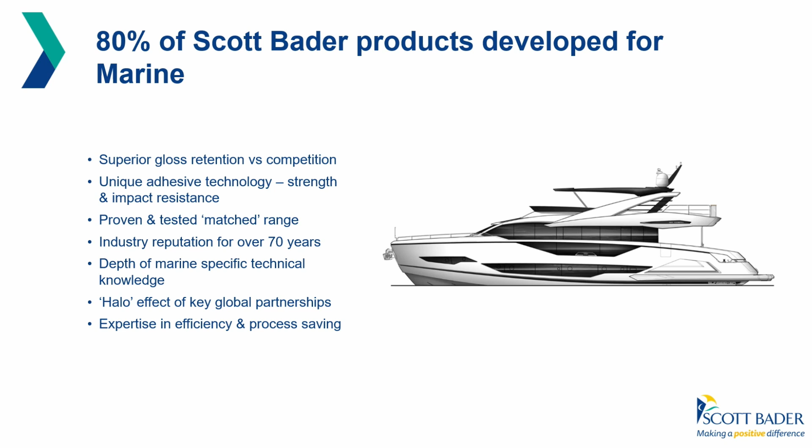This is just, I don't know if it's got a pointer.

This is just a diagram showing you where some of our products go into the marine industry. If you look on this side here, our Crestomer range, Crestafix range, I'm not going to go through each product individually, but they're used in deck to hull bonding, for core bonding when you're doing your PVC cores onto your laminates, your small fixings. Your Crestomers, it's metal to GRP, they can stick polyurethanes, they can stick various things.

And then obviously you've got your hand layup, the Crystic range, which is your hand layup resins, ISOs, orthos, we do vinyl esters, infusion products, 679, that's an infusion vinyl ester. We've got our interior finishing, so we've got Crestafix F26, which is for core filling. There's top coats for lining, the bulkhead for Crestomer bonding, gel coats and weathering for blistering.

So our LS88 and LS97. 97 is our spray gel coat, 88 is the brush gel coat, once again with great weathering abilities, and skin coats, vinyl esters. As the gentleman was talking before me about vinyl esters and water absorption, blistering, osmosis, we do our range of vinyl esters for those applications.

Fuel storage, we've got our resins that can handle various fuels, chemicals, different heats, and for diesel as well we've got a range of products. In the engine rooms, we've got our fire guard, which is part of our Crystic range. If there's an area with a possibility of fires, we can use that to coat it. And in the engine bed, stiffeners for bonding once again. So it gives a quick idea of where the products go and the range, and these are the products we are focusing on at the moment in Scott Bader Brazil into the market.

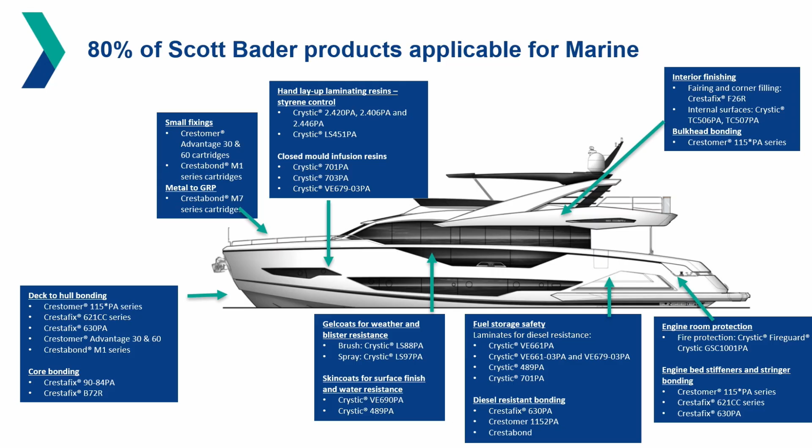Our marine range is basically summing up what we saw on the diagram. So the benefits of the matched systems, aesthetics. On this side you've got gel coats, LS30, which I'll discuss now, LS97, that's a spray version, and the brush, LS31 or LS88. Skin coats, vinyl esters, we've got 690, and 489, which is an ISO resin. And then on the laminate side for hand lamination we've got the various range, and then closed molding, RTM, those kinds of things, we've got a list of products as well.

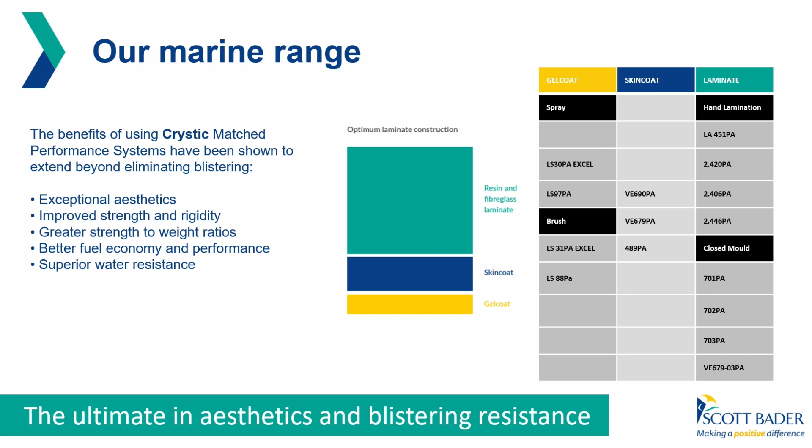So Gelcoat LS30 is one of our latest technologies, for better words. It's something that we spend a lot of time and effort in as a group. It's a strategic development product with our R&D facility, and this was also done in conjunction with a big customer.

So one of the big problems that most people have in the industry in boat building is porosity on gel coats, whether you're spraying it or brushing it. So LS30 has been developed over a period of time, and it reduces the porosity, well, almost eliminates the porosity if used correctly. Like any product, if it's not used correctly, it's going to fail. If it's used in the right application, it's good.

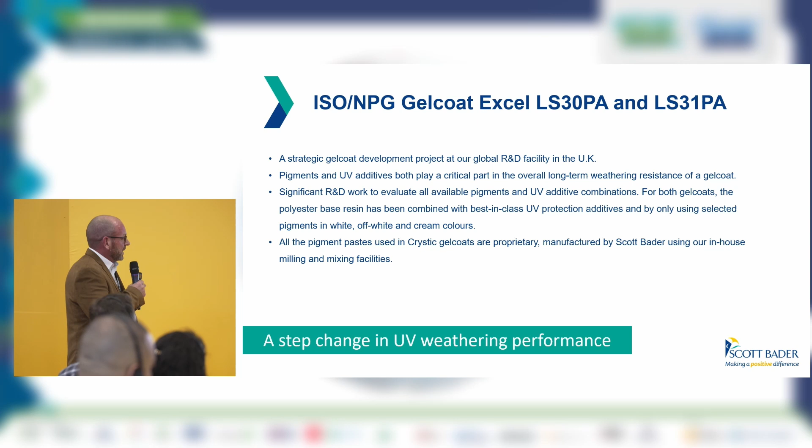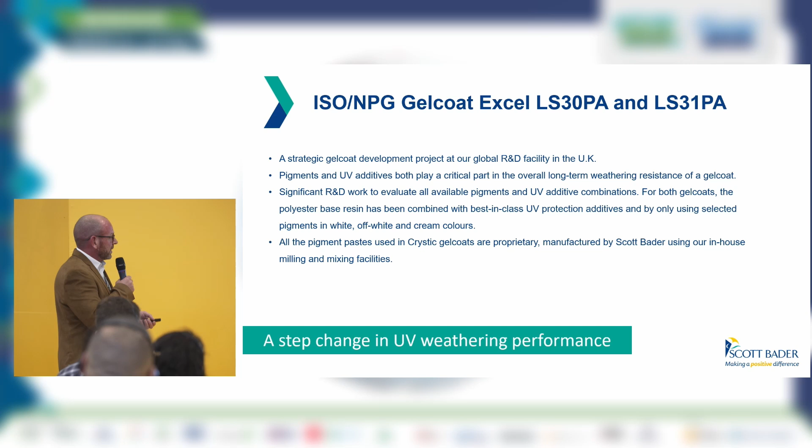It's also got excellent UV and long-term weathering. It's been tested in the Florida weather testing. As I've said, a lot of work has gone into this for R&D. We've sourced the best pigments. We manufacture our own pigments in Scott Bader as well. So once again, a great product for no porosity, excellent weatherability, and excellent UV.

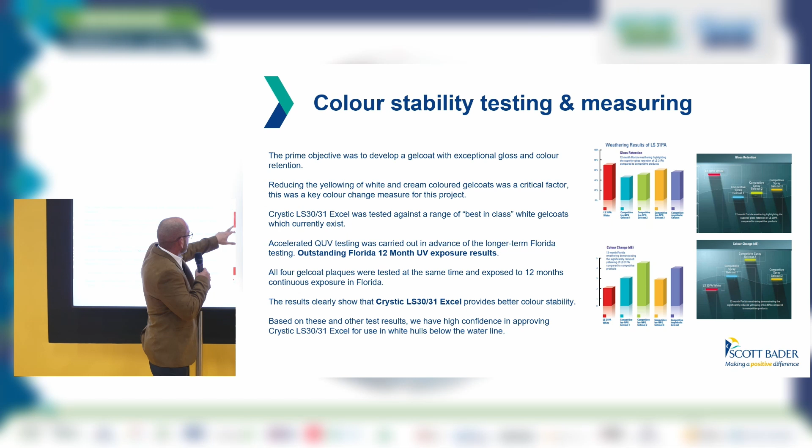This just shows you some of the testing that's been done. Obviously, we want to get the best gloss and color retention and get away from the yellowing and those kind of things that happen over time normally with the boats. LS30, we tested it against some of our best-in-class competitors' products over the Florida testing, the 12-month, and you can see some of the results over here. There's LS30, and there's our competitor on gloss retention and color changes; if you're using the color spectrometer, you can see that it outperforms.

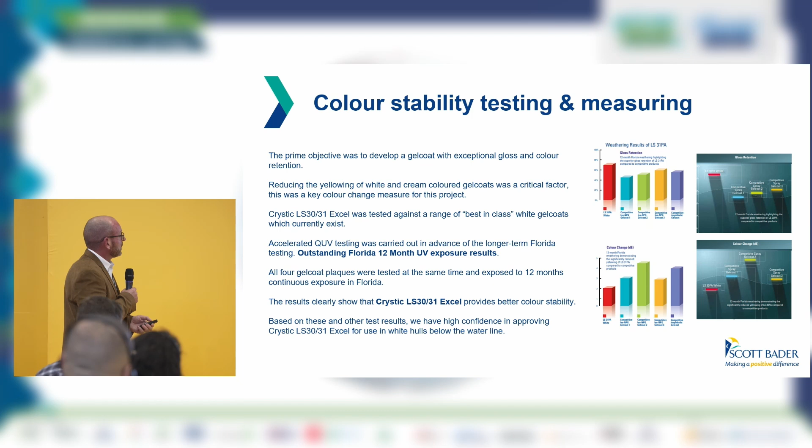Going back to the vinyl ester skin coats, our vinyl esters are a DCPD blend, which have also got excellent blister resistance, and the DCPD helps with the shrinkage, so it also reduces the print through. So when making parts, it acts as a print blocker or a print reducer, so you get a better aesthetic finish, and also as an osmosis barrier. This is used for production of boats and also in our tooling range.

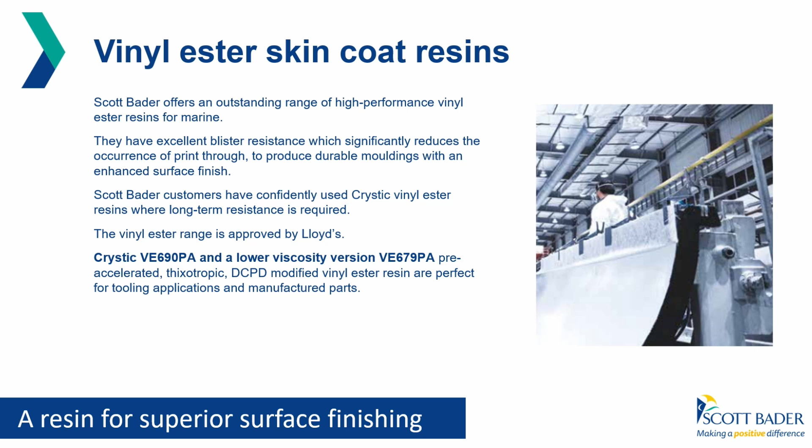Our match tooling system, so this is our Crestamould matched tooling system. So we've got products for a plug manufacturer, your plug or tool, I'm not sure what people call it. Then we've got obviously the finishing off of that and then going into the mold making. So typically you would use a wooden base and a steel structure, maybe a polystyrene or an MDF, some sort of substrate that gets machined. We've got a product called B21 Sealer.

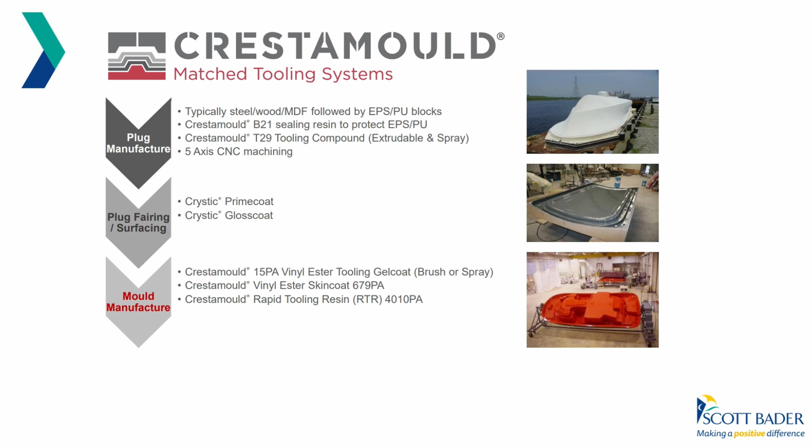It's a polyester based product that's compatible with polystyrene, because generally polystyrene with polyesters doesn't work, it eats it up. That's why a lot of customers would use an epoxy to put on the first skin layer as a base. Then we've got Crestamould T29, which is a tooling compound. It's sprayable and it's also extrudable. It's a polyester. Putting it on about 30 mils thick. Best to use it with an extrudable pump. Cover the product. When it's cured, it gets machined.

Once it's machined down to almost its finished stage, then we've got our Crystic prime coat and gloss coat. The prime coat is a high build primer. On its own, you can spray it up to about 1.5 millimeters thick. You can sand it, polish it, and it will give you a great finish to make your mold. But on top of that, we use the gloss coat. The gloss coat's a lot harder wearing product, so it gives you a better surface finish, and it polishes a lot better. It's just a lot harder to work.

So what customers would normally do is blend it 50-50. You can blend it in a 50-50 or a 70-30 ratio. So 50% prime coat, 50% gloss coat, or 70%, 30%. And then once that's all done and ready, we go to our mold manufacture. We've got our 3-step molding process, which is our vinyl ester tooling gel coat. It's a gel coat 15 PA. It also comes in a brush and a spray. And then once that's applied, it's the vinyl ester skin coat with our vinyl ester 679, DCPD modified vinyl ester. And then our rapid tooling system, which is our RTR 4010, which is applied in a minimum of 3 to 4 layers of 450 gram matting.

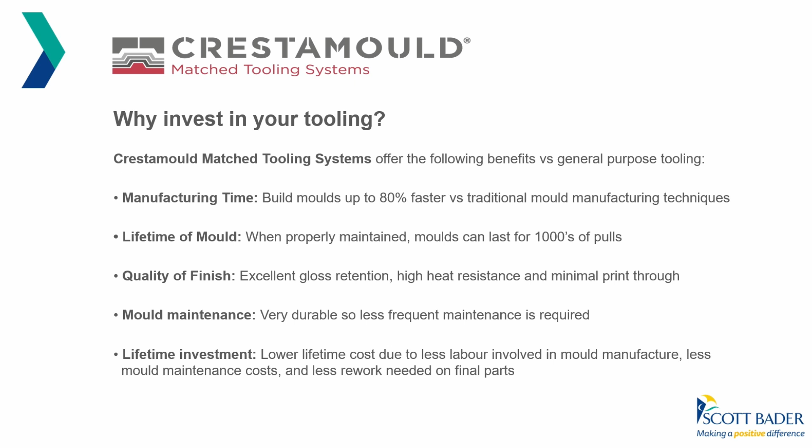You can get one pull out of a mold, you can get 1,000, depending on how you look after that mold. If it's released properly, how you handle it. So if you handle it correctly, you can get many pulls out of those molds.

The gloss retention of our Gelcoat 15, it's a vinyl ester base, is also really good, and it's also got high heat, high chemical resistance. So if you're post curing parts, those kind of things, it can handle that without distortion. Mold maintenance, because it's a durable system, the mold maintenance is reduced. Once again, depending how you handle your molds and how it's held into production.

And then spending money on a mold and a plug is probably the most critical part of any process, as you would know. If you don't do that right from the beginning, your parts are replicated from your mold and from your plug. So it's best to spend money. It's an investment for your end product.

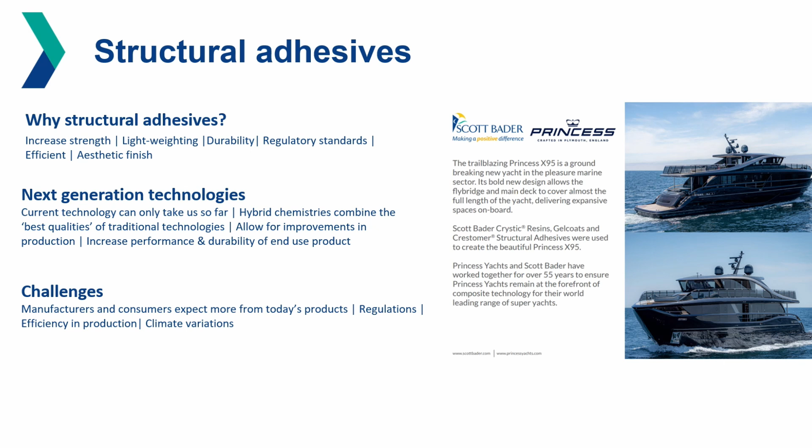Structural adhesives, as I was talking about slightly earlier on, are Crestabonds and Crestomers. So our structural adhesives, why would you want to use structural adhesives? Once again, increase the strength. It's a lightweight alternative, durability, and it helps with aesthetic finishes. There's many benefits to it. Our next generation technologies, which I will talk about on the next slide. I'm just going to go across to Crestomer.

So this is one of our really amazing products that we've got in our range, Crestomer. It's a urethane acrylate based product. So it's not based on a vinyl ester or a polyester or anything else. It's a urethane acrylate product, which is styrene based. It's got a low styrene content, so low emissions when working with the product, it's easy to work with. And due to that as well, it's got a lot less shrinkage. It's a slow curing product, and the benefit of that is that your print through is reduced.

So if you're bonding a bulkhead or some sort of part into your hull, generally people would put it together and put a general purpose bonding paste to get a radius and then over tab it with fiberglass. With this, you don't need to do the fiberglass tabbing. All you need to do is the fillet of Crestomer. We've done many tests over the years, and I won't name our customer, but they've been using it now for the last 15, 20 years with no over tab.

It's got 100% elongation, so it's very rigid, not flexible like a rubber product, but it can handle some movement in your boat over time. There's a range of curing times as well. If you're going to be bonding a 100-foot boat versus bonding something smaller, there's various times that you can get on your curing or your gel time. So from maybe 60 minutes to 80 minutes to 2 hours, depending on what your application is.

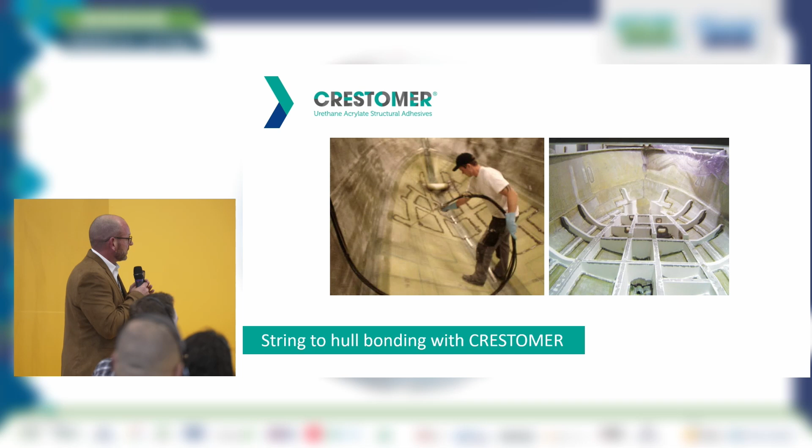Crestabonds, these are MMAs, which are the methacrylate-based products. It's a two-component, and it's based on acrylic technology. Once again, also high performance and strength. It bonds to various mediums as well, so we can bond fiberglass to steel, to stainless steel, stainless steel to stainless steel, multiple products that it can bond to, into wood.

Our specific products don't require any primer. It's just clean, prep the surface correctly, add the product on. It's once again got very strong, excellent fatigue resistance, and there's various cure speeds. So we get M105, which means it gives you a 5-minute, depending on your ambient temperatures, sort of 5 to 8 minute curing time, a gel time, and within that you can times it by around

about 3. So within 15 minutes, that thing's got 80% of its fixture time, which helps as well in the benefit of a process where a lot of parts are mechanically fixed. You take out the mechanical fastening and use a product like this, you can take your part out for mass production, move it on, carry on to the next one. So it helps with that and many other benefits.

Gap filling properties from 1 millimeter up to 50 millimeters, which is quite a big gap. You don't want to be on 50 mil because you're wasting adhesive. High elongation, which obviously helps with the reduction of stress on the parts. Minimal surface preparation, as I mentioned. No primer. It's a solvent wipe, a sand, a solvent wipe, and apply. It can bond to zinc coated and galvanized. We have a product that can also bond to those galvanized or zinc coated products. And it bonds composites into the pultrusion and plastics as well. We have a product for that.

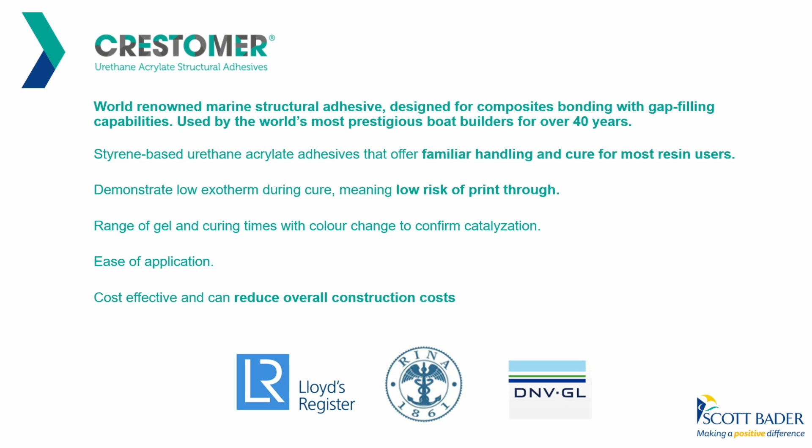Okay, technical support and services, as I mentioned in the beginning as well. Scott Bader prides itself on its tech support and its 70 years of experience in the marine market. When we join up with a customer or we start a partnership, we will be there on support. So if there's any of our products to be trialed, whether it be gel coats, adhesives, whatever we're trialing, we will be with you through those steps from the beginning to the end. Until that product's approved, until you're happy with the product and it's running your production, we'll be there to support

that. We also have after sales; part of the continuous process is we'll always be there if there's any challenges, looking at other issues, to be a technical partner, not just to sell you a product and disappear. So we'll go through those steps. We can have all the products tested with our labs, the extended weathering tests. We can help with the repair process and sign off final color confirmation with our gel tint system and our X-Rite machines that we've got in our factories. We can get out any colors that you've got on RALs, Pantones, any colors. We can match according to what you need.